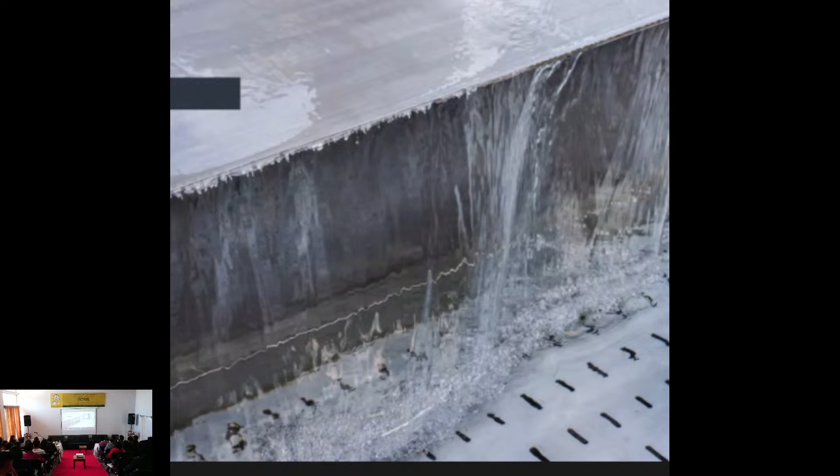And I also like the sound of water, not only the water without silence, but sound of water, the music of the light, and also cascading green and light together entering into deep. I like the untamed green, not only untamed green, also tamed green, very cultivated green, which is very much inspired by our landscape. And I love to see how the light is penetrating into deep in my project, and it's like dancing within.

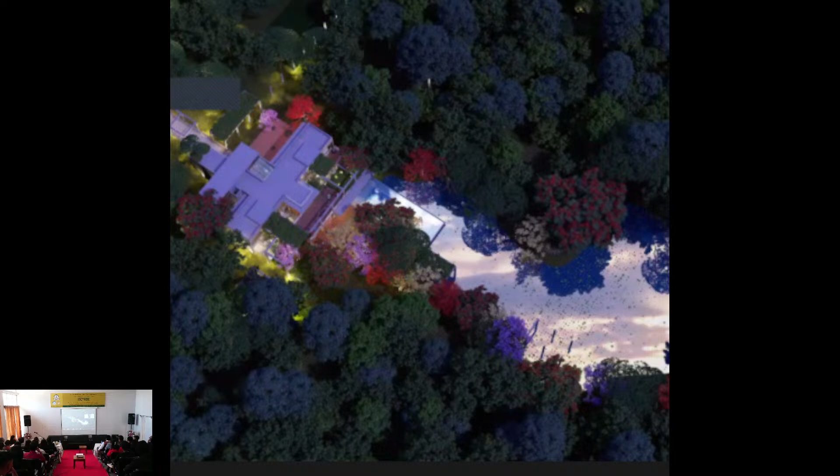And then the incline in the afternoon, it inclines and inclines, and it's stretching its last light to twilight. But after the dark night, crossing any sort of foggy winter morning, the first light, when it touches the land and water, it turns into watercolor again. So to me, architecture is very poetic, like watercolor or like a painting.

So at one stage, I started rethinking my country where I used to live, Dhaka, which is almost tropical. So how should we deal with urban tropicality? Because in the rural area, tropicality is beautiful, but in the urban dense city like Dhaka, how should we rethink urban tropicality? Definitely, tropicality is all about green and water and moisture and things like that.

This is one project we did in 2001. This is a drawing from 2001, almost 22, 23 years back, when I think the whole world was not thinking much about green architecture. Of course, my green architecture is not typically today's green architecture coming from points marked on a checklist. It's coming from Bangladeshi lush green and water and rain and sunlight and things like that. So this is what I started thinking, how we should deal with urban tropical architecture.

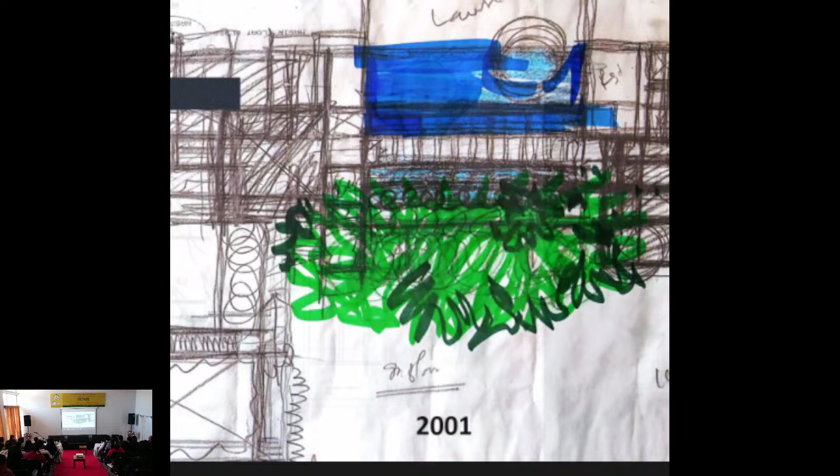So I started calculating how the sun is moving, how it inclines in the winter and comes back to the vertex in the summer, and how the wind comes from southeast or southwest, some wind without rain, some wind with rain water. Then how to plant every floor with upper floors of large, long trees, creating every floor actually as a tropical floor. So this is all the detail we started working on, and then coming up with something like a swimming pond.

We call it swimming pond, meaning we should have steps into the water, which I think in India is also called ghatla or ghats, and large trees like a jangla, a sort of untamed forest. So this is rethinking the built environment, not a typical swimming pool, but a swimming pond.

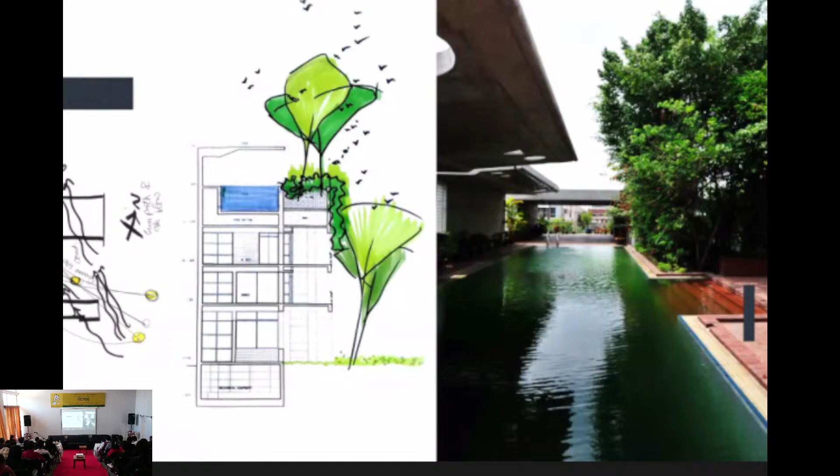So this is what we ended up with, that house. It's like a very untamed Bangladeshi landscape with water and rain and things like that. And gradually we were doing a lot of similar things, like we said every floor should be the ground floor. I mean, since we have beautiful light, alluvial soil, and rain, why not create every floor full of greenery so it becomes the ground floor? So I love to live always connected to ground.

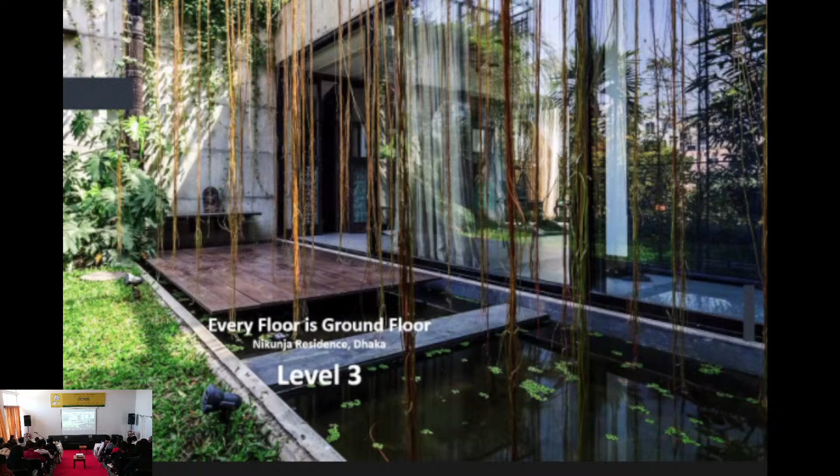I don't want to go 20 stories high without my belongings like water and green and birds and sunlight and the sky all together. I would like to go up and up and up in the sky, but with my belongings. So this is the upper floor, level 3. Still you can see a lot of greenery and living in a tropical area with the beauty of all the natural things. And this is another upper level floor.

And then we need to actually rethink. The subject, the conference on rethinking, is not a constant word. I mean, it's a continuously changing word. We must rethink and rethink and rethink every possible time and project. We need to rethink and reinvent the newness and the nowness together.

So rethinking the history, Bangladesh is a very, very old country. We have almost 3,000 years of historical evidence, like Buddhist monasteries, for example, more than 2,500 years of history. So if you see such a beautiful courtyard created by the Buddhist monasteries for educational purposes, these are all viharas or universities for enlightenment, Buddhist enlightenment.

So when we started designing Aga Khan Academy, the school, the first thing we started thinking was that we must connect our historical educational history in terms of all senses, like space quality, the material, the education, enlightenment, all the things together.

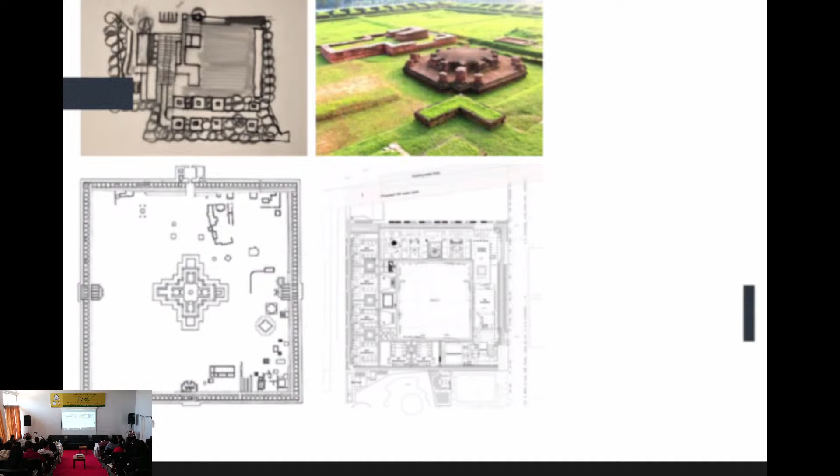But the essence of brick is there. So we incorporated a sort of half scientific approach, coming out from the archaeology but going towards the future. This is the final master plan, surrounded by a beautiful large field, which is the spirituality in the middle, surrounded by buildings and courtyards.

Here you can see one part of the building, and the plan, since we call it education, a didactic place. Didactic means something which can teach you - you can learn from it without somebody teaching you like teachers do. The idea is we will learn from the environment and the structure, not just by teachers teaching us. The tree you see is called Butea monosperma, actually Palash, red flowers, local name Dhak.

Dhaka's name, there is a legend that says it came from the Dhak trees, because we have thousands of Dhak trees in Dhaka, red flowers. So we planted the tree in the first courtyard, so children can learn that Dhaka's name probably came from these trees.

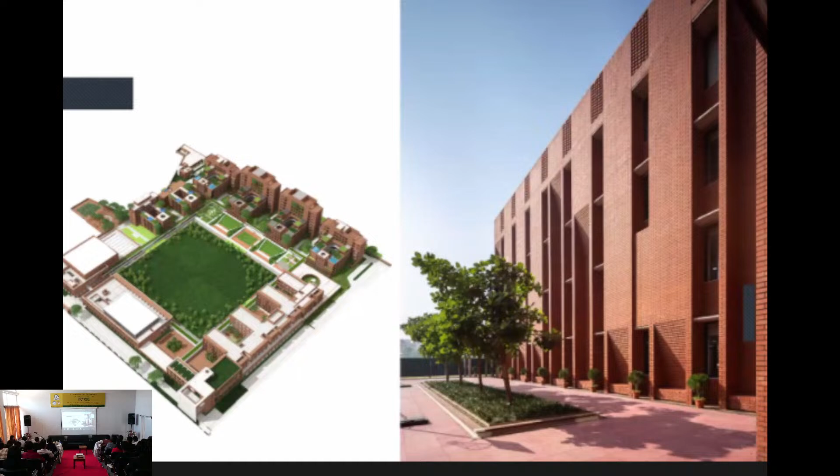This you can see is the central courtyard with the amphitheater, and the brick crafting is all important to reflect our history, our education, our mastery of the brick, and the nowness. And you can see the children are really giggling.

This is the field, the large field, and some of the interiors - the library and tiny gardens on the upper floors. This is the amphitheater full of children, pupils, and the teacher addressing them. That's the space quality that children will be learning in, and the vastness, the power of space, will hopefully make them very powerful.

This is what the last slide shows - the benches are almost like archaeological, and then it comes out as a full building gradually, showered by the winter light in the morning.

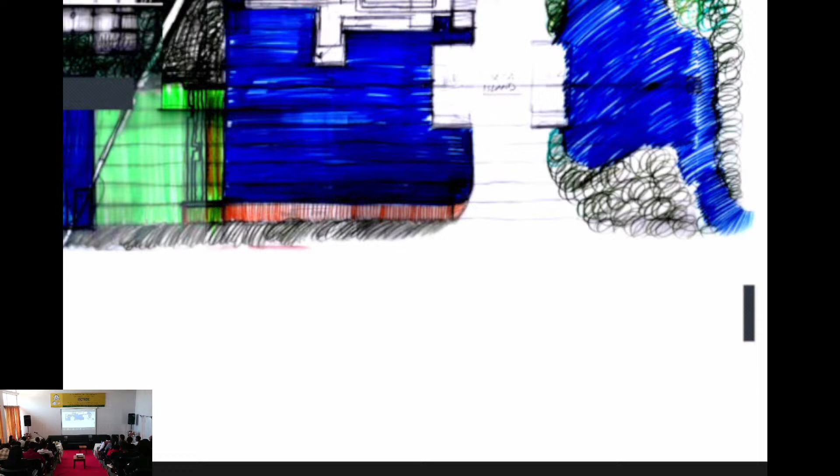And when we move from our country to another country, still tropical, you can see the Malaysian project - the client is very powerful, very aggressive, very rich, one of the largest developers in Southeast Asia. So tropical antiquity - we wanted to create something very classical, very powerful for them, but also tropical. This is what we came up with: 11-story columns with a super roof, shading most of the sun.

Creating a powerful statement of tropicality, the whole semi-basement roof is turned into a water body, a very shallow water body, not more than 200 millimeters, or 600 millimeters, sort of a rainwater collecting pond, with the whole building on it. But below is actually 350 cars. So it justifies the tropicality, collecting rain, and in case of fire hazard it's very useful for fighting fire, also giving a sense of tranquility.

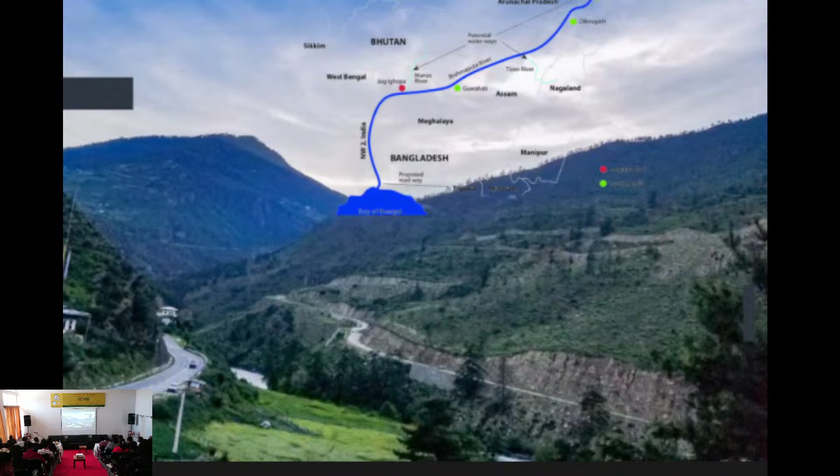Bhutan is very happy to recognize that the Buddhist monastery, Buddhist enlightenment that Bhutan is practicing, and having a peaceful country, is actually offered from Bangladesh. It's a gift from Bangladesh to them. The historical, archaeological sites of Buddhist monasteries - Buddhism created their hub in Bangladesh for many thousands of years and spread all over the world from Australia to Canada. So this is a gift to Bhutan.

Bhutan is very happy to have it from Bangladesh, and that's the reason Bhutan actually helped us during our war in 1971 and gave us recognition as the first country to recognize Bangladesh as an independent country.

So we were not only examining all the historical and geographical connections, but also checking out the traditional courtyard that they have. We have similar courtyards, and they have beautiful windows that we don't have. They have large canopies on the roof, and Bangladesh also has large canopies because of the rain situation. So there are many similarities, and also some interesting differences.

We are also interested to understand how the sun moves, how it inclines further south in winter, and the amount of rain - which is 1599 millimeters annually, while Bangladesh is almost 3000 millimeters per year. So we're not very far away, but we have more rain, they have a little less.

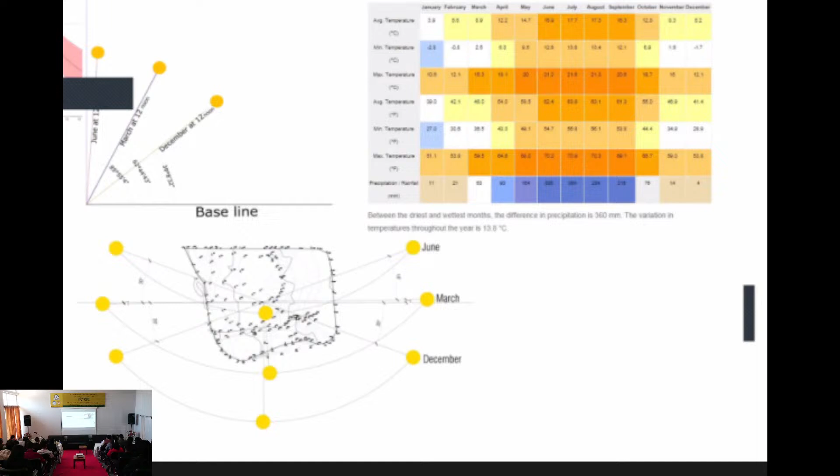The river is going down gradually, so my drainage system is not in a bad situation - I can put all the water into the river, and we can see the beautiful green Himalayas. And this is what we have created.

A small water body in the central courtyard - we call it Bay of Bengal, as if collecting water from the Himalayas and calling it Bay of Bengal, which is Bangladesh, now at the feet of the Himalayas. Now the Himalaya can see the water she created is the Bay of Bengal, belonging to Bangladesh, now came together - that's how we're coming together and creating our diplomatic relationship.

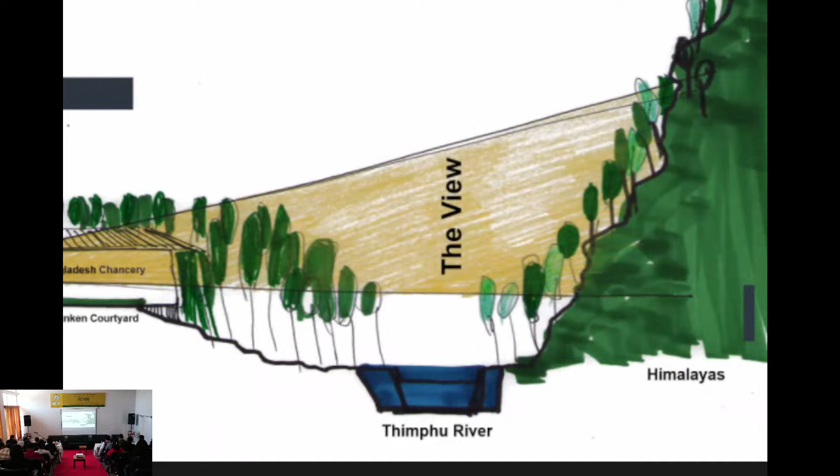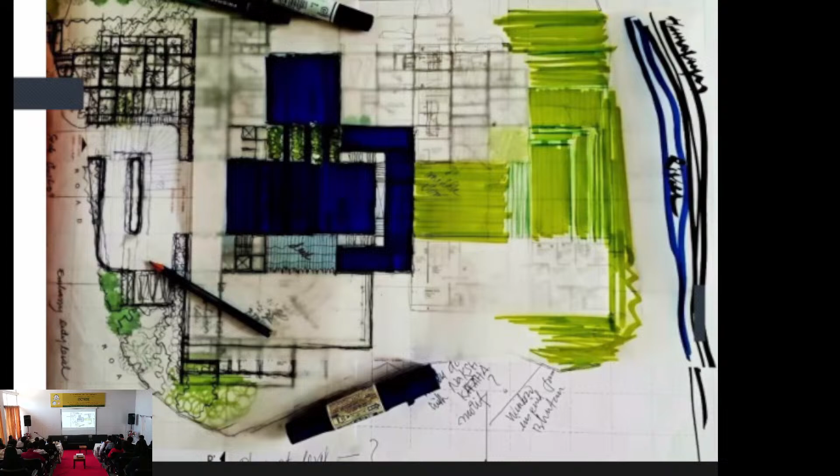This is how we are rethinking our relationship. You can see the courtyard with the water, and the buildings surrounded by it - the water court and green court, surrounded by buildings, all collecting the sunlight in winter from the southern and western sides, making it warmer.

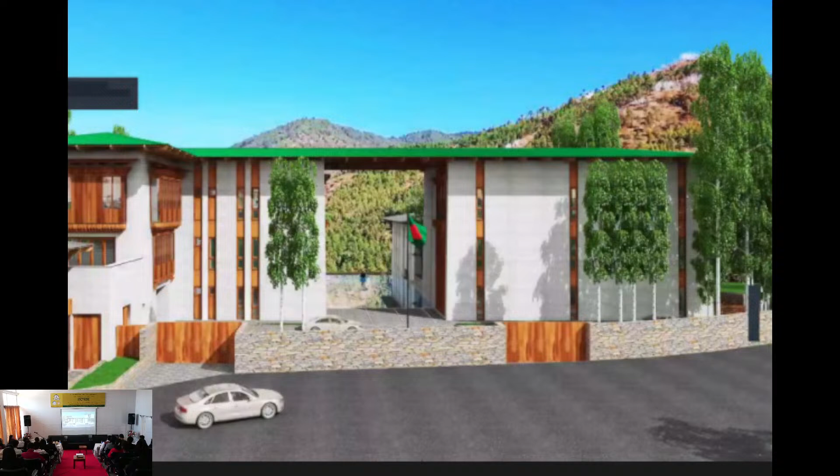So this is how the building came up. We also followed most of the Bhutanese rules, because we don't want to break the rules, though we have the ability to - as an embassy, we could build whatever we feel like.

India has built a completely modern building, which has nothing to do with the Himalayan architectural language, but we actually respected their language because we know how they earn money through tourism by showing people similar buildings, not different types. So this helps them in their financial development - our role should be positive there.

So you can see a big window punched through - I can still see the old Himalayas from the street, which has been there for a long time. We didn't want to hide it completely from people's eyes, so we created a social window to still connect with the Himalayas in the background.

So we used concrete for the first time because the Himalaya region is very vulnerable in terms of seismic conditions. You can still see the courtyard with the water and the reflection of the Himalayas - and this is what it looks like in the evening.

Rethinking archaeology - when we started working in Pakistan, interestingly Pakistan is exactly opposite to Bhutan. Not our friends, not many years actually they've been friendly with us, no connection in terms of water or culture or any other ways, but we came together as East and West Pakistan and ended up fighting each other, killing 3 million people of Bangladesh by Pakistanis.

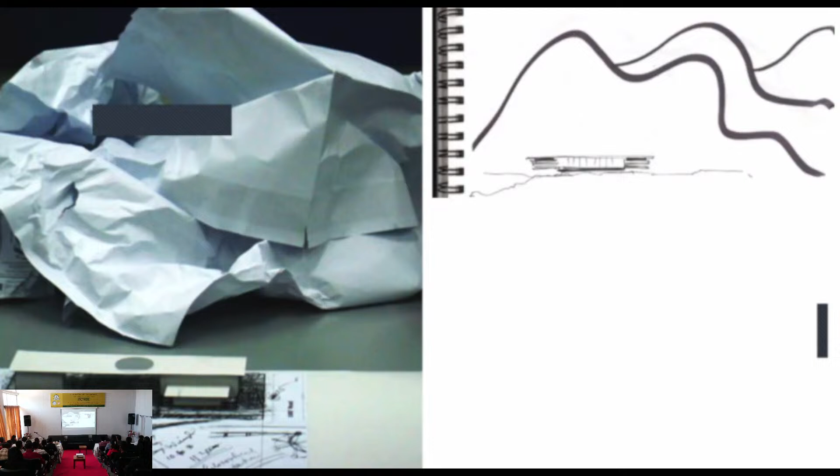So we took advantage of connecting historically, not in a current way, which is very difficult with Pakistan. This is what my site belongs to, a large 7,000 foot high Margalla Hill, and we have a very humble building over there, very contrasting to each other, showing the power of humbleness against the ruggedness of the Himalayas.

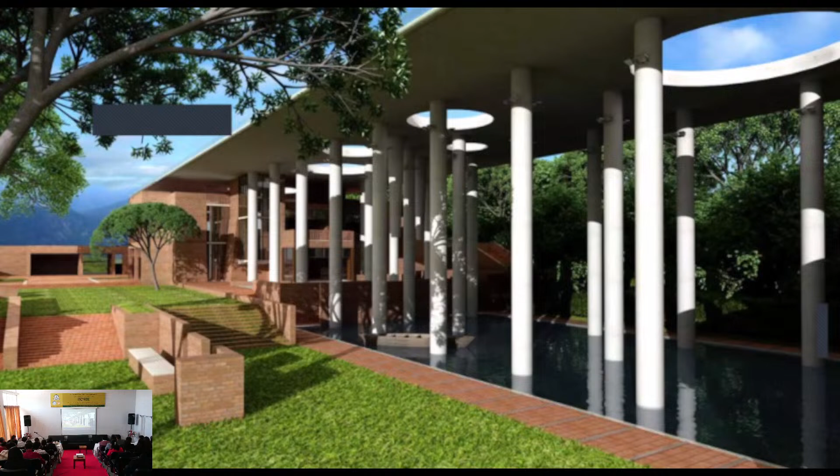So this is what we came up with - archaeological-looking Lahore brick, a locally available brick structure which looks like archaeological sites, covered by a huge super roof, 500 feet long, with punctures to collect some rain and also some sunshade, creating a shallow water body for moisturizing the whole area as much as possible to cool down the temperature and reduce use of air conditioning and heating systems.

Rethinking built environment is the last portion of the lecture. I'll be sharing three projects basically, after roaming around the world lecturing here and there, teaching different universities, and learning more and more, or trying to learn more and more.

Finally, after COVID, I thought about what I'm achieving, what I'm looking for, where I'm going actually. Then I looked back to my old part of Dhaka where I was born and brought up. I left when I was like 22, 24, 25 years old, and I went back and saw old Dhaka is actually dilapidating further and further, losing the quality of built environment. And I'm doing nothing - I'm just achieving some awards and projects and earning a little money for survival or a better life, but I'm actually doing nothing for my community.

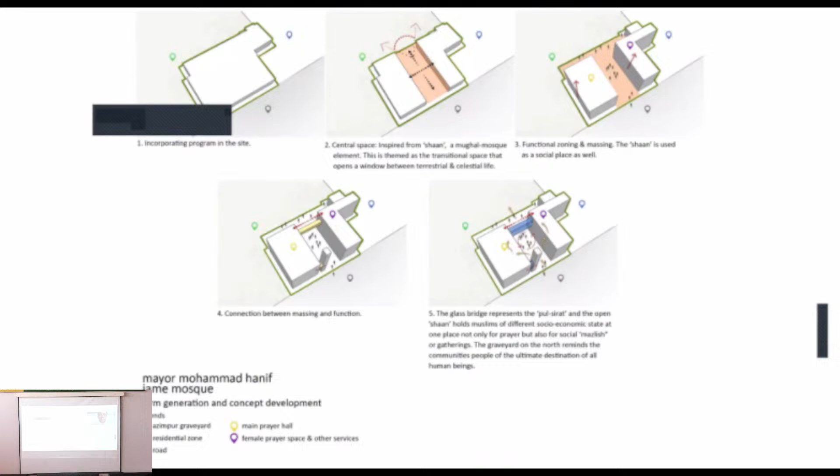This is how we created the spirituality in the middle of the mosque, the Shaan, inspired by the Mughal mosque. You can see the green patch is the edge of the graveyard, and this is how we created a puncture in the middle of the building, connecting the street and the celestial graveyard, and separating the service area from the served area — the mosque itself is the served area. You can see the mosque as the served area, and the ramp, car parking, ablutions, toilets, stairs and other things on the right-hand side part.

This is what you can see of the mosque. On the southern side is a dense, heavily built terrestrial world, and on the other side is a very tranquil, green, celestial, and silent world.

But the interesting, challenging part — we learned that the mosque was actually built by a person who is a political party leader, now running the government. You can see how politics works in our country: the father of the nation and the prime minister's photos are still the smallest. Gradually the local leaders and the mayor, in suit and tie with black hair, have larger photographs, but the contractor himself has the biggest photograph — he's the local political leader, so his photo is the biggest one. You understand he is the power over there, and he is going to build.

Actually, he is going to rehabilitate — the government rehabilitates this sort of people, and they earn money out of it by ruining the architectural project, just earning money and not doing quality things. This is the strategy, the hegemony that has been going on for many, many years.

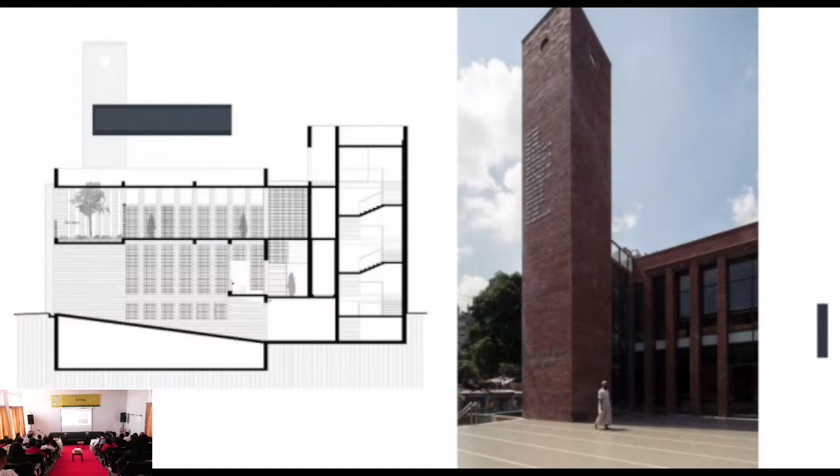And these are the sketches and sections you can see. This is how the brickwork happened, very carefully done. The person walking there was actually the contractor's first choice — we provided him because he is very good at this sort of brick construction. And you can see, in the twilight, the courtyard, which is a public space for the community, with the mosque inside and the glass bridge.

A place for women, we can pray over there. Inside the mosque, you can see they connected to the graveyard through the window, and the skylight coming in. The imam who will be leading the jamaat, the people who will be praying, the imam will be under the beautiful light from the sky, heavenly light, and the floor is beautiful.

All space belongs to him, rather than putting a mihrab, which is a normal thing in the mosque. We didn't do that. It was a very challenging for us, but anyway, we did it.

Now we move on. We did 31 parks and projects, parks and playgrounds to be revitalized. One of the playgrounds was really bad shape for the last 30 years, and we were unable to do any improvement. But we did a lot of research and finally came up to this current situation of the same old playground. I'll explain the last two projects, how we did it, and that will be the end of my presentation.

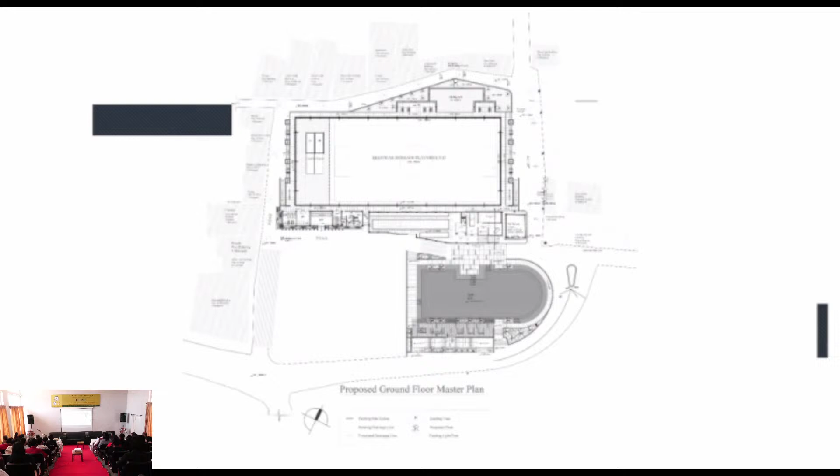We also improved the saint's mazar, or tomb, of the person who donated the field for the community. We improved the tomb, surrounded by a library, gymnasium, public toilet, coffee shop and things like that. Finally we came to this solution: the field itself, surrounded by walkways collecting the rainwater, and the pond, and all the mazar and tomb, everything created.

It was an old photograph. Now we can see how we improved it. You can see the conical crematorium for the Hindu community, and the public space, with the Hindu community gathered. And this is what you can see: the minaret of the mosque for the Muslims, and the Hindu crematorium beside the Kali Mandir, and the public space all belonging together.

So harmony came, and the field, which was in a really bad situation, is now totally improved. You can see the whole thing together, the mazar and other things together, creating a community. So architecture can make community stronger, further and further.

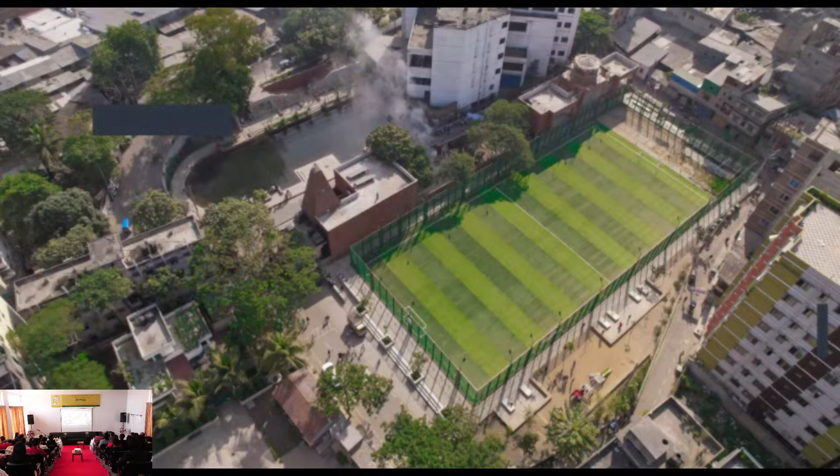The last project is Last for Life, the Rasulbagh Community Park, Shishu Park. This is the only way we can go to the park, there's no other way. You have to walk through a roughly 1 meter wide corridor, which floods in monsoon, and is unhealthy otherwise. When you reach the park, it's surrounded by a wall, and the walls are illegally occupied with shops, so it's very difficult to even see what is inside.

This is the only drain collecting rainwater, also collecting the sewer system of 19 houses, and the whole thing is illegally occupied. One sewer is flooded and staying that way for months, and you can see live sewer floating around, which is extremely unhealthy for people, particularly children. If you see inside, the plant is dirty. There is a building built for veterinary purposes that never had any function, but it's illegally occupied by a political party office. Now it's very difficult to push them out.

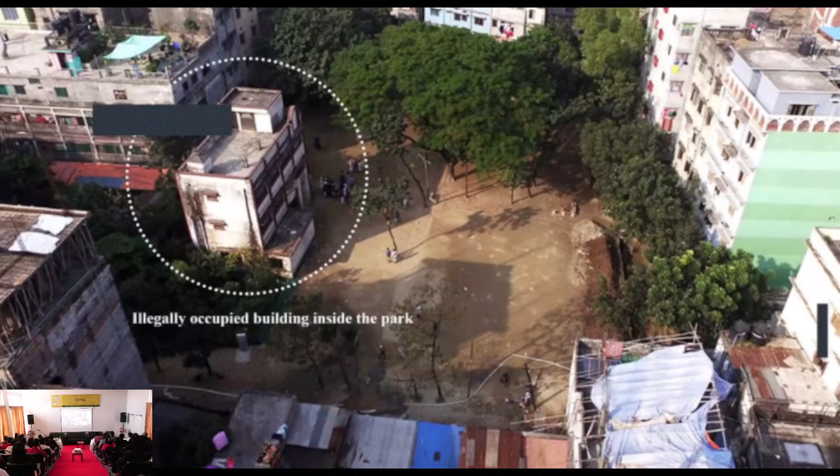You can see what we call a public children's park, which is absolutely not acceptable. For the last 40 years, it's been happening like this. What we did, we developed almost four philosophical understandings.

One is that every park and playground's surrounding walls and barbed wire or grills or fencing should be removed and completely open, telling people it's theirs. Nobody is going to tell you to stop. There's no gate, everybody can go there and occupy it. It's 3 o'clock in the morning, doesn't matter, so it will be owned by them. But we cannot just leave it open without it being properly taken care of.

Another big problem is the rainwater. Huge rain, and it's always flooded, and then mosquitoes and waterborne diseases are suffered by children particularly. So we manage the water actually. We have a crisis of drinking water, but we have a huge amount of rainwater we cannot use. We die for drinking water, and we die for malaria and dengue and other things. Very funny and interesting.

We started calculating the amount of rainwater, collecting it, filtering it, and then giving it back to the community as drinking water. So we started conversation with the people, listening to their sufferings and problems, and how to resolve them. Together we started sorting it out.

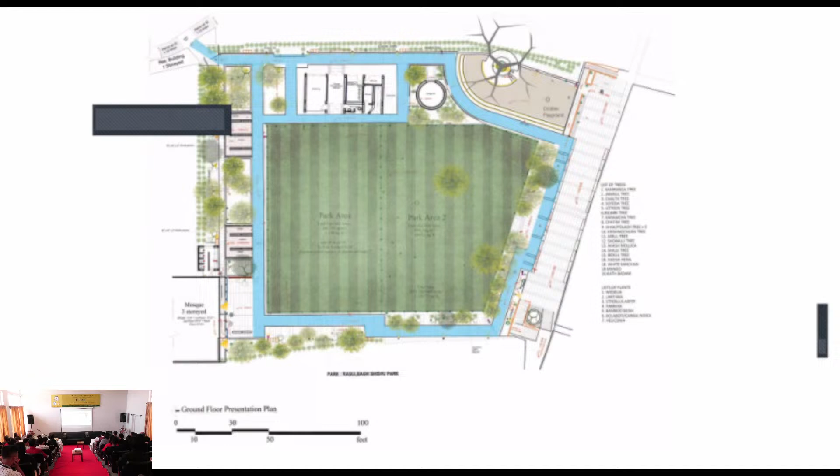Now the park is totally in use. The walkway actually contains a deep trench, about 5 feet, 1.5 meters by 1.5 meters, which can collect all the rainwater separately for drinking purposes, filtering it and giving it back for drinking. You can see the section, both sides have trenches, and the dirty drain water has been separated so it cannot contaminate the rainwater.

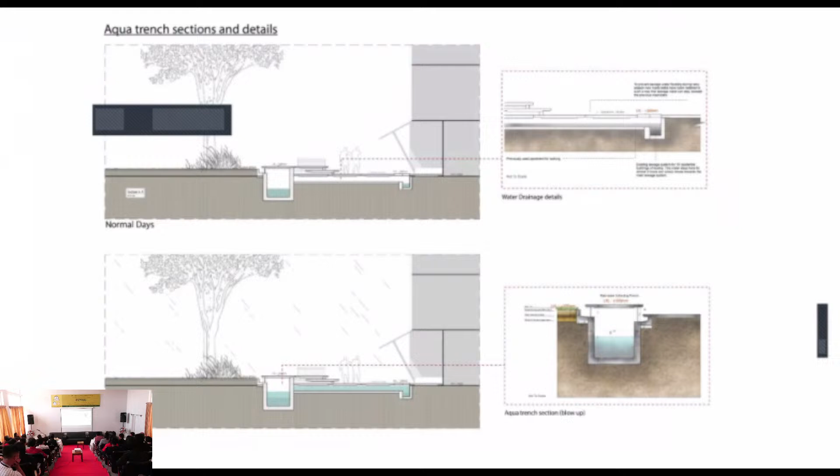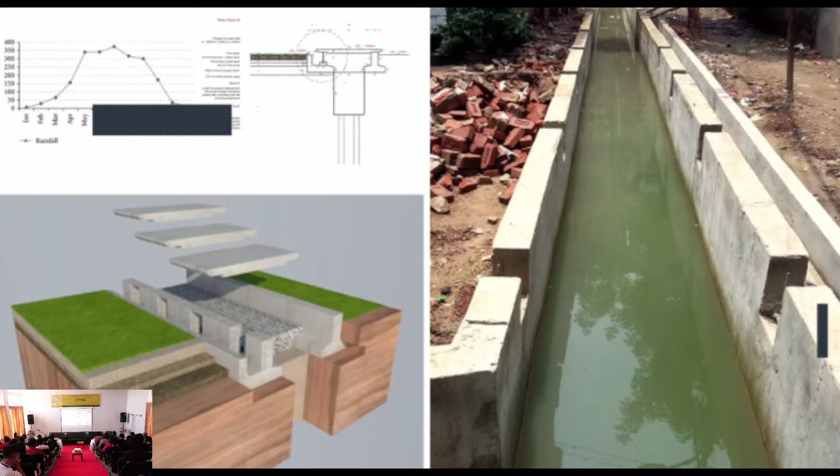This is how we separated and collected rainwater, and we started cutting the trench. You can see the trench started with one drain collecting water. We couldn't bring big materials inside, it's so narrow, so we only built 1200 pieces of concrete slabs, which did all the work of covering and creating the space.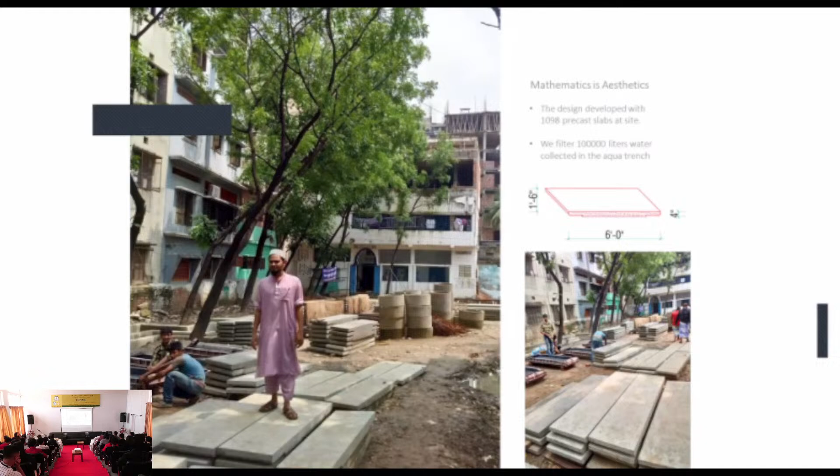Now finally we dismantled the wall as a philosophical execution - dismantling disrespect and distrust rather than just dismantling a physical wall. Then it turned into a space, and you see all the people gone to the other side, opening their shops legally rather than illegally.

Now you see after the rain, it's immediately much more beautiful. It's a beautiful park, and it's raining. So rain is no more a pain, it's a celebration. You can see the earlier photograph, and the same spot now is full of plants, like a beautiful garden, made by the children themselves of the community. They planted all the plants and fruit orchard - very tiny local fruits like chiku, custard apple, and star fruits and things like that.

Very humble and simple. More and more birds are coming, and more children are coming. They are eating, birds are eating. They're seeing each other, knowing each other, and they will be running after butterflies.

No more drugs, that was the philosophy. And now you can see adolescent girls coming out, which is almost non-existent in our society. Normally they don't come out due to fear, and the built environment is not favorable for them to come out.

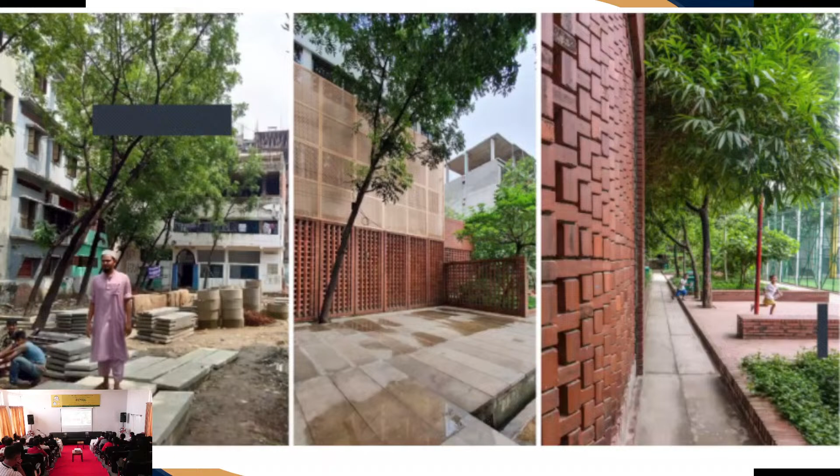Lack of money, we couldn't do that. But finally we managed to push the political people out of the building, and converted it into a women's club, community library, gymnasium, and coffee shop, which finally came out like this.

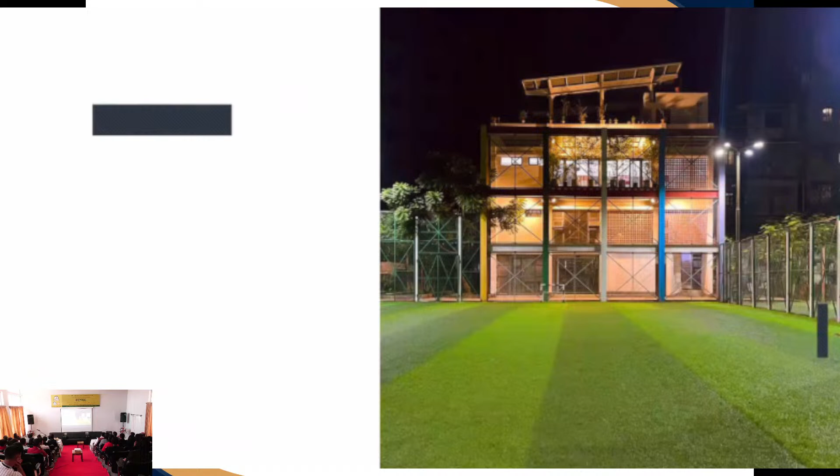And you can see the children are inside, and it's a very popular library nowadays. It's always full of people over there.

The women's club is always busy, as old Dhaka people are very religious, many women. They used to come here, they sit, the children can come, they can play, they can draw pictures here.

And finally, this park looks like this, but the adjacent community situation is really very challenging. Inside the park it's very hard to manage, it doesn't match with the outside, so we had to put people over there.

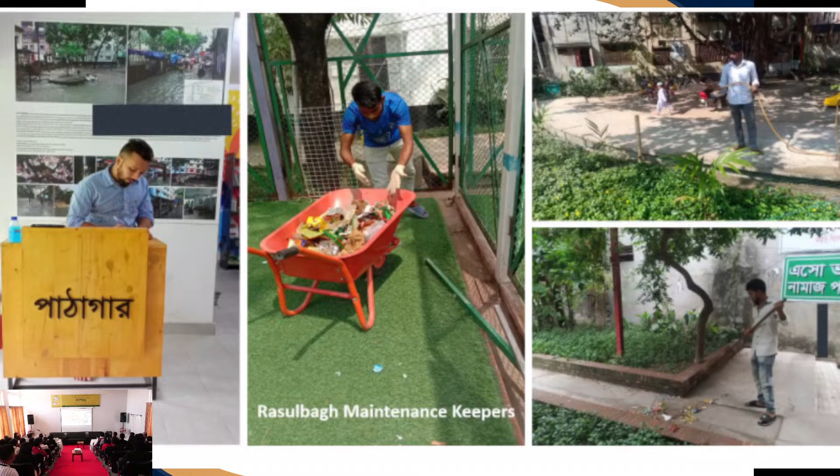These people are from our own office. People want to keep it and show the community. Maintenance is very important, so they have actually been maintaining everything for the last 4-5 years.

Now you can see the people are collecting water, very fresh water, for the last 5-6 years, and they're very happy to have the water every time for the last many years.

And finally, you can see the children are laughing, they are just playing over there. The whole purpose of doing architecture, or any profession, is to ensure our children are growing up safely and happily. That is what we are trying hard to do through our architecture.

So lastly I have a 3 minute video, which was built for the United Nations and UIA, and it won the award as one of the 21 finest projects in the world. That will be the last thing I'm sharing with you.

This is the evening, the new evening that came to Dhaka, old Dhaka, and this is what we call the old Dhaka news story. I'm running this one. I hope you can listen also, if the sound works, no problem.

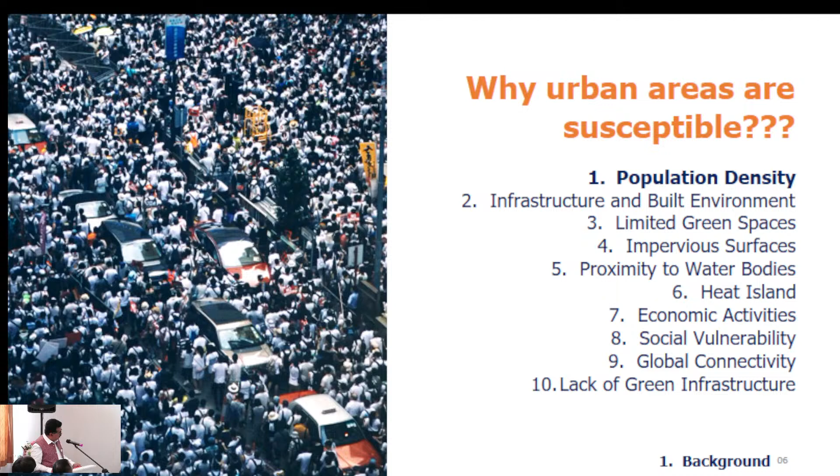And then second one is infrastructure and built environment. I am finding it difficult to take it for a second. Now you can see the kind of infrastructure, that's transportation hubs, roads and lanes, parks and playgrounds, recreation areas, and the kind of areas where the city has got its own image in terms of the particular town. It is getting overstrained because of the high level population growth and unorganized development.

When there is such kind of unorganized development, what are the ways we can look at organized development? There are several things we are seeing: transit-oriented development, compact city development, and other developments like fringe area development. These kinds of densities, once they get increased, in what way can we bring the thought process in terms of the infrastructure? That's infrastructure, especially...

Yeah, it is better, I think I can keep the messages. So these are the built environment specifically related to what? Whenever we get a built environment, in what way are we going to address it? First, the kind of solutions like different land use zones we are having. In the land use zones - residential, commercial, industrial, or institutional - all these areas, as an architect, how do you address it? Addressing in terms of land potentiality, land utilization systems, climate, and other items like what it is going to get influenced - topography, climate, and other items which influence nearby land uses, traffic generation points, and connectivity - all items which create an impact on the built environment.

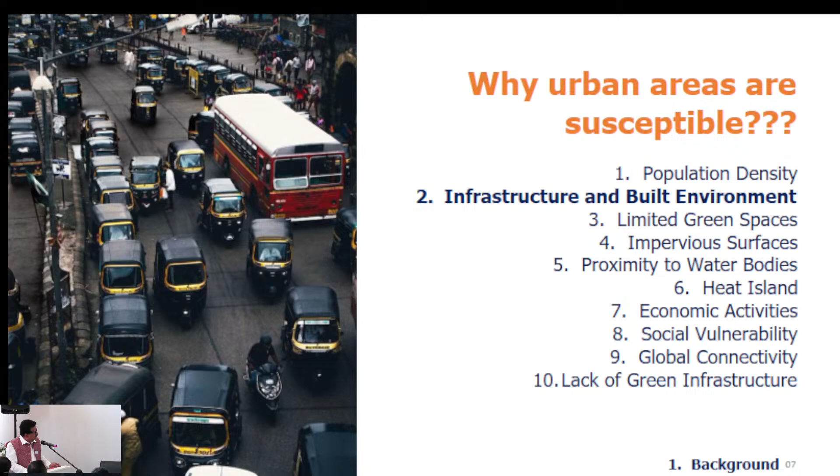Limited green spaces - what I am speaking about is water and the green spaces. They have been developed and people keep enjoying it. Green spaces meant for two parts. One, in what way that vegetation index overall is going to contribute to the pocket of space, what it has been designed for different types of development process.

Whether that built environment - a built environment has to be seen on the basis of the floor area being used, and floor area versus occupancy. Occupancy related to the open spaces we are giving. The open spaces meant for paved and non-paved areas. When it comes to non-paved and forest areas, then to what extent is the vegetation going to get addressed. That vegetation related index, in what way it is going to provide per person how much square meters of area we have provided. So at a master plan level, 8 to 10 square meters of space we have to provide for the green space.

Such times, once you are not in a position to make it to the city level, urban level, or built form level, then in what way can these green spaces be addressed? Green space is not only a piece of land you mark for it. There are many ways we can address such things - what kind of vegetation, paved and non-paved surfaces, soft and hard surfaces - what we are going to design, and in what way we want to quantify it.

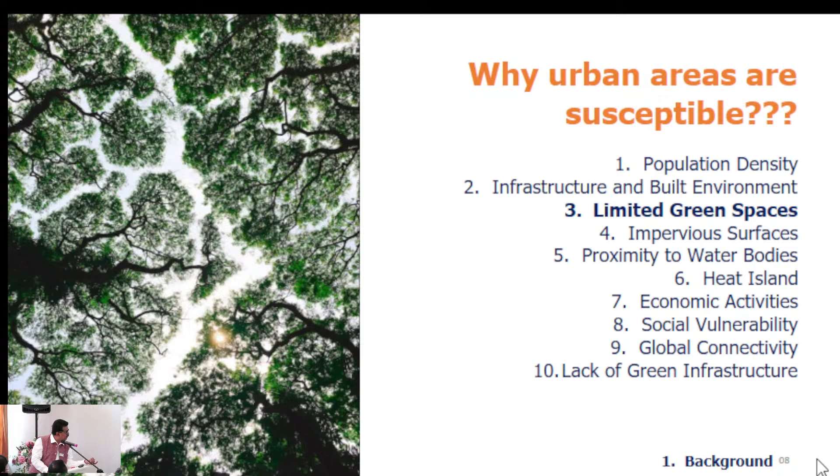Impervious surfaces - what are they? There is so much paved area we have nowadays. This is exactly how floods and other problems occur. The issue is that paved areas normally make the runoff go to one particular place, where there are low-lying areas and highlands and lowlands. Lowlands get flooded, even with cloud bursts, because of how the drainage system has to be designed.

Everywhere there is a system where you keep safety conditions. For instance, at this speed, this many meters per second or cubic meters per second of water has to be moved from one line to another in a residential pocket. Street to street it has to be worked out, and where it has to really get collected. The collected water - how much is going to get absorbed. After absorption, the runoff starts and floods different pockets.

How can we address this? In the Indian context, the moment most citizens buy a plot, immediately the person will put a compound wall all around. The compound wall and the road really end up covering the natural slope, blocking how the natural streams are getting across.

In some places what we have introduced is: you can have a compound wall, no doubt about it, and build whatever form you want. But at the floor level, don't disturb the contours, don't disturb the natural flow. Make perforations beneath the compound wall. For instance, if you have a foundation and the water needs to cross 2 or 3 lanes to reach the discharge point where it's supposed to get collected, the perforations allow that.

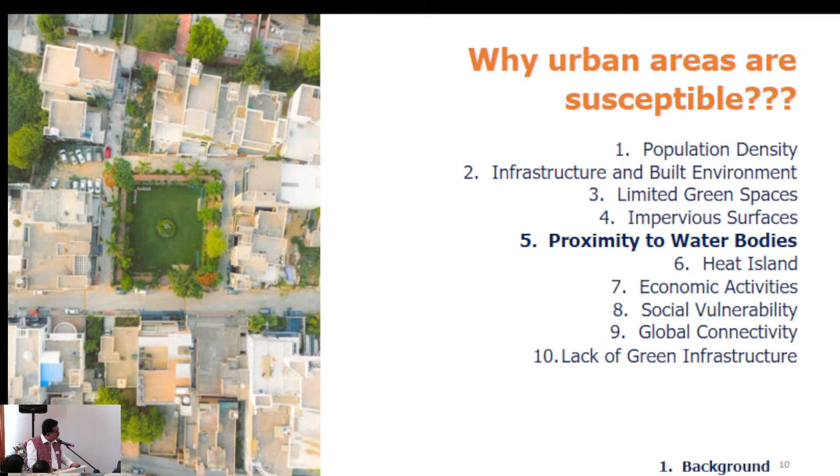So, as you know well, the heat island effect. Why does the heat island effect happen? Because of exposed surfaces and the change in climate and temperature rise, especially in summer. Exposed surfaces mean the facing materials or any other material getting exposed to solar radiation and temperature, both together called sol-air temperature.

Sol-air temperature works like a film on the surfaces of the materials. Through the conduction process, through the thermal behavior of the materials, heat moves from the higher side to the lower side in the form of conduction.

Higher side is outside, let's assume for example. Then the temperature and radiation together, in the morning, heat the surfaces. Just think about what exactly solar temperature means.

If you start heating a pan, what happens if you bring it closer to your hand? You need not touch the pan; once it comes very close, you start feeling the heat. The reason is it creates a film of heat, as the solar radiation continuously heats the external surface of the wall.

At the same time, the sol-air temperature is the one which is higher than the indoor temperature, so the conduction process starts. And the conduction process also depends on the behavior of the material we are using, that is the K, rho, C value generally we say: conductivity, density of the material, and specific heat of the material.

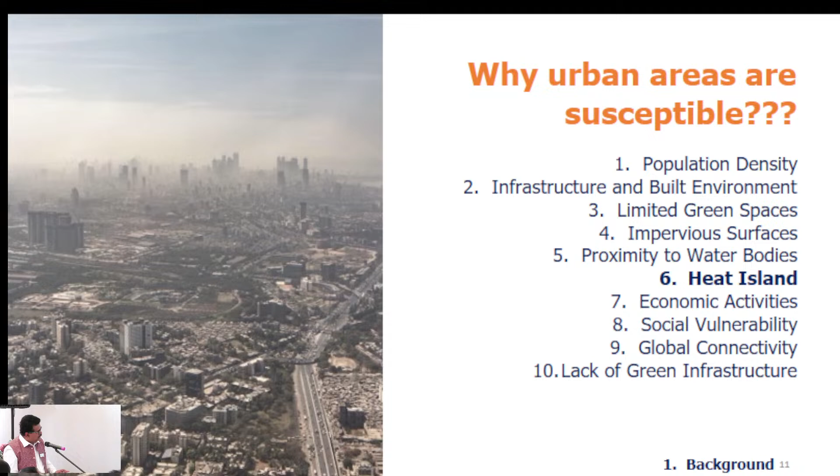Economic activities, we have to think especially in terms of economics, how affordable it is. The affordability of one particular place may not be the same as other places. Our main target is to identify who are really more susceptible, the vulnerable groups where we have to look at it.

Either it may be urban slums, or areas with dilapidated conditions as shown to us in Dhaka. There are so many community levels where community organizers' role is also required, making them understand how to work out a better environment in different locations where haphazard development has taken place, with buildings constructed that are dangerous to habitation.

They may not have the technical understanding and technical know-how, and may not have been constructed with proper thought process. Such buildings are subject to seismic attack and seismic conditions. Even if the Richter scale reaches 3 or 4, minor vibrations may immediately occur and cause the slab to separate from the beams and columns.

So to what extent this economic activity and affordable groups, the vulnerable groups and economic activity, has to be critically viewed. In cities, specifically urban areas, you have different types of economic groups, even starting from economically weaker sections, low income group persons, and MIGs and HIGs - all persons are susceptible to climate change.

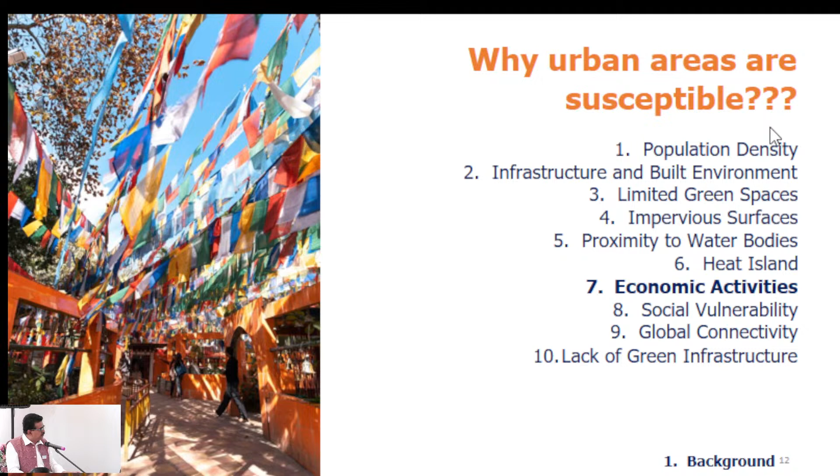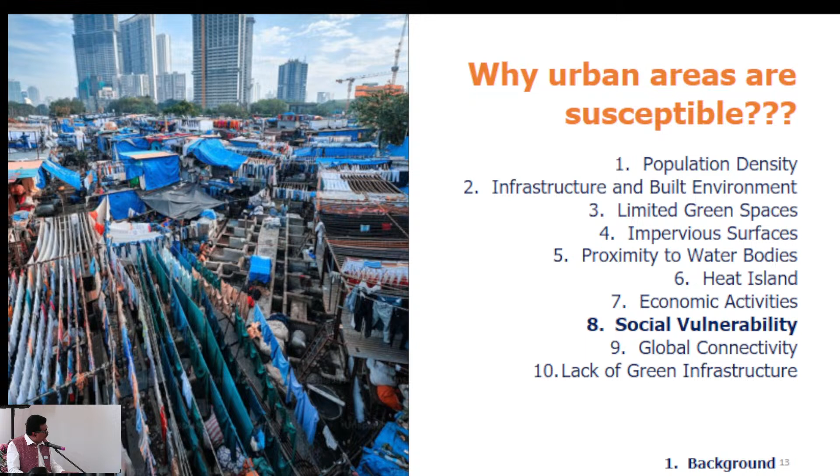Social vulnerability, probably I have seen it. Then specifically when you look at this global connectivity, TODs, what we are thinking about, other than the general built form and built form related environment, is what we think about to bring in better conditions to a particular town or any other country, in planning and other items.

Other than that, there are areas of transit-oriented development, TODs. TOD means an area where people are giving a very big focus. A hub is going to get developed, either medical facilities and supporting facilities required to nearby settlements in the regional planning, or in a region which is really missing, sometimes an educational activity and a full township, connecting to the highways, district highways or national highways, and closer to the cities. That kind of thing can give facilities to them, and you can create a better environment.

These transit-oriented developments are essentially required, and that is what we can call global connectivity - maybe airport areas, and the corridors leading to ports, corridors leading to airports. Why this is so important is the logistics of goods, and the kind of economy that gets generated.

In such areas, earlier in built form developments or broader town level developments, we used to not encourage ribbon development. Ribbon development means development next to the road - if road connectivity is there, the entire stretch from one settlement to another, along the connected road, you see development on both sides, and then development starts only after two or three depths of streets. This is generally not advisable, because it becomes a very heavy burden on the local bodies to provide municipal services - either solid waste management, provision of electricity, or piped water supply. So ribbon development we avoid.

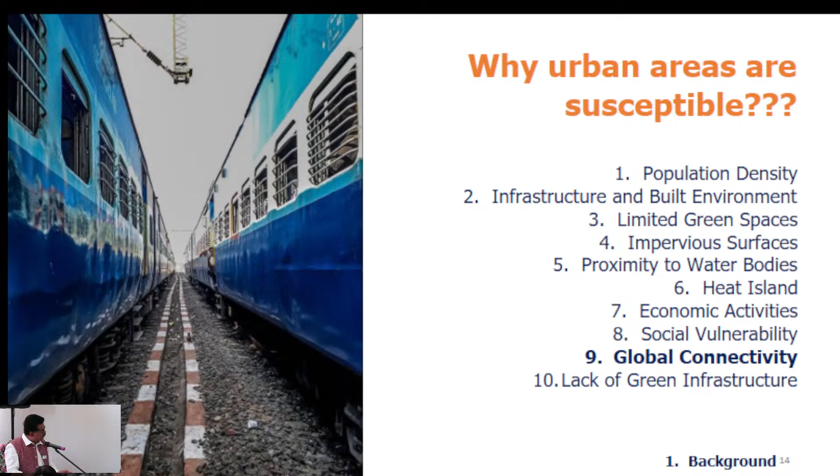Of course, green infrastructure I have broadly covered. Given these vulnerabilities, this is crucial for urban planners, even policy makers, and specifically communities should adopt climate resilient strategies in urban development and disaster preparedness. This is one item we should keep thinking about. Secondly, we can focus more on how resilient and contemporary these cities and communities are, and how ready they are to face the multiplicity of challenges and uncertainties in the future, because decision making under uncertainty uses operation research models.

We are slowly entering into the digital world. You people may not be knowing this, but just around 1985 or '84, we used to punch cards for the computer just to do Fortran programming. With punch cards, we used to go to a computer this big at the AC Tech campus of Chennai. There would be a big queue - electrical engineers, mechanical students, architectural students, all standing in a queue. I'll tell you, from morning 4 o'clock onwards we used to be there in the queue, because if the assignment wasn't given within the time set by the professor, we would get a zero directly. So we would complete the entire Fortran programming and punch the computer cards.

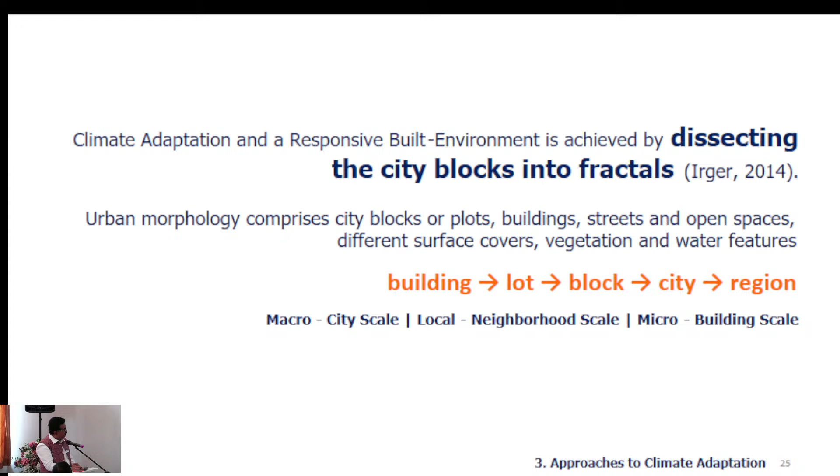where is this again?

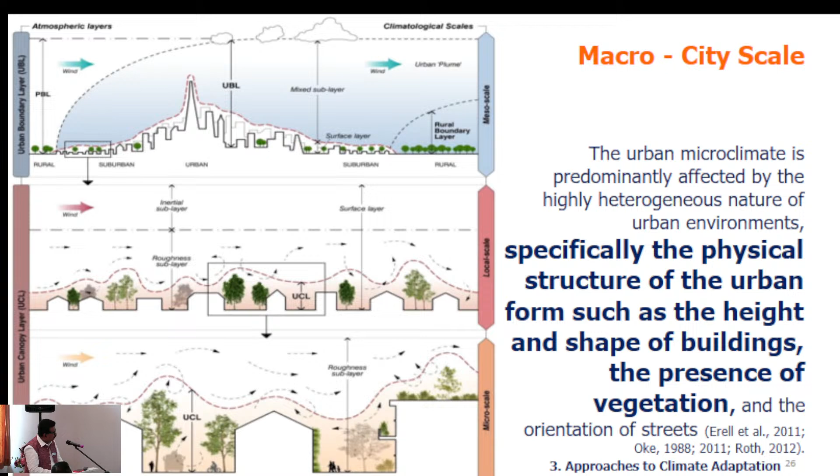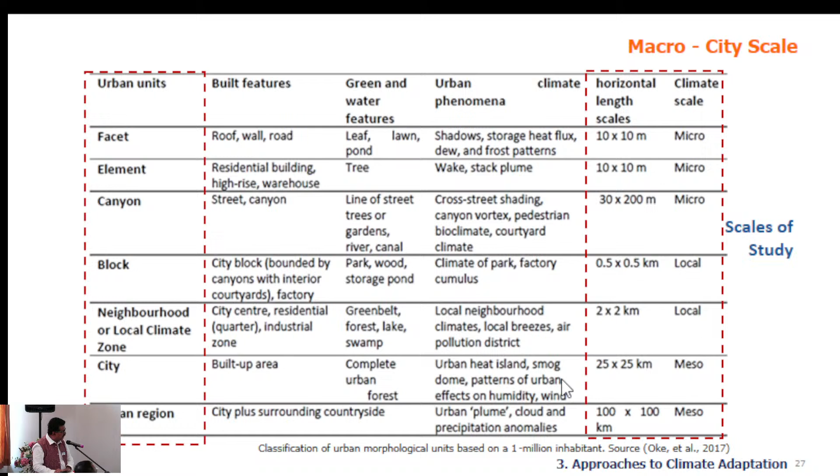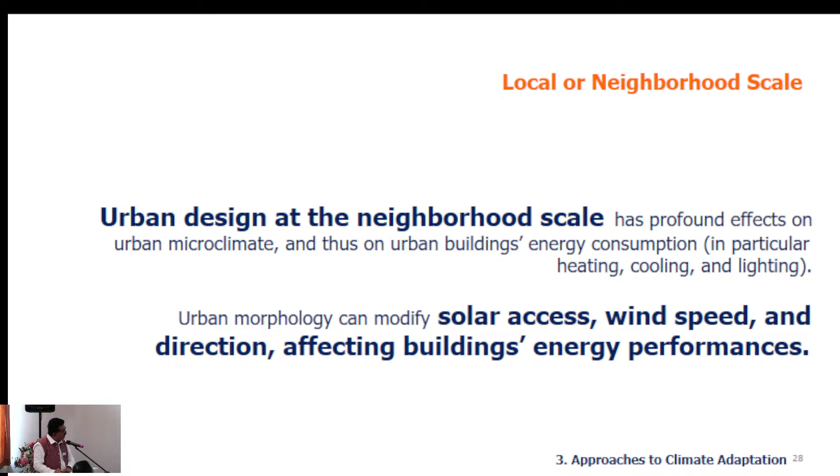Urban design at the neighborhood level has a profound effect on the urban microclimate, and morphology can modify solar access, wind speed and direction, affecting buildings' energy performance. So broadly you can see items like type of use, domestic systems, efficiency, space heating and domestic hot water systems. Every item works together to give parameters, and there are effects like radiation - if you look at it, albedo and emissivity it creates.

Thermal - if you take heat effect and capacity and thermal mass storage systems, it talks to that. Moisture means to what extent we can seal the evaporative surfaces, increasing surface runoff and reducing evaporation. Roughness is the roughness index - all these items, when you build an algorithm, become the coefficients that get multiplied to give you the appropriate results. So these are the items that a particular software or algorithm looks at - radiation, thermal, and moisture.

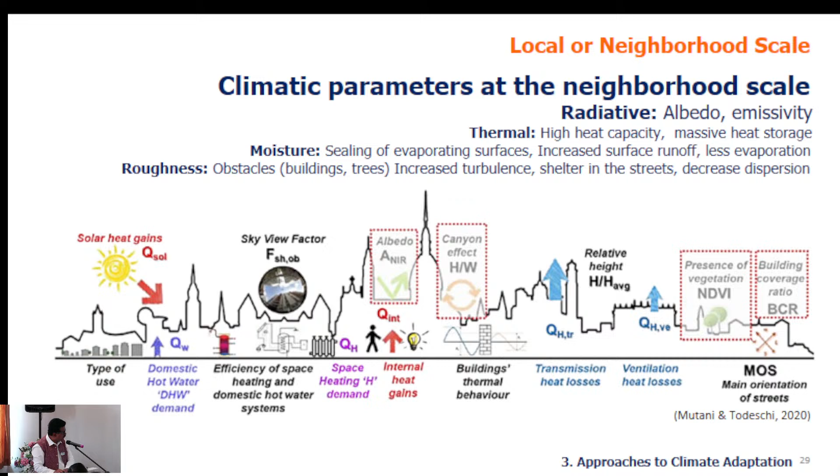Sir, I have time. N is the built form - the sky view factor, aspect ratio, building footprint, impervious, pervious, height of roughness, and terrain roughness. These are the important parameters.

If you work out the built form of a cross section, you can see how we can work out all the other items and bring better conditions to different regions, whatever fixed conditions you want within the building. Within the building, you have to fix these conditions. For such conditions, what is the orientation, what exact opening sizes, what exact heat transfer from outside to inside for different months, different seasons, or different regions.

Can you press? Okay.

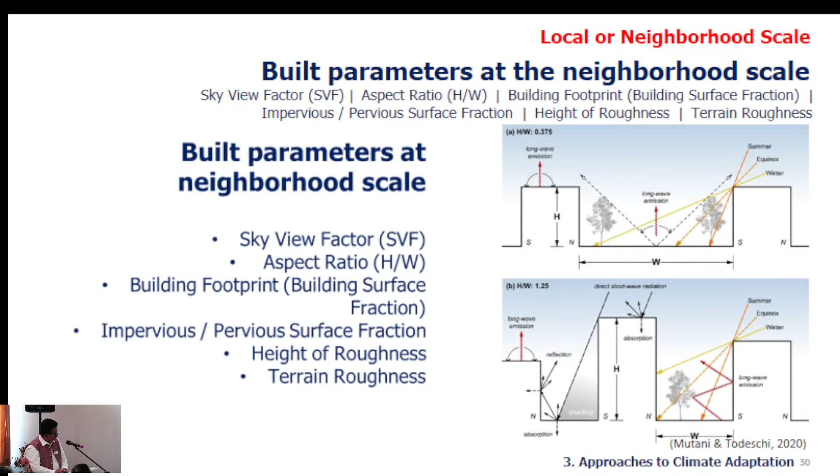So the equations I am telling you about can calculate at the local and neighborhood level. Now, because of the shortage of time, I know how much time I can take.

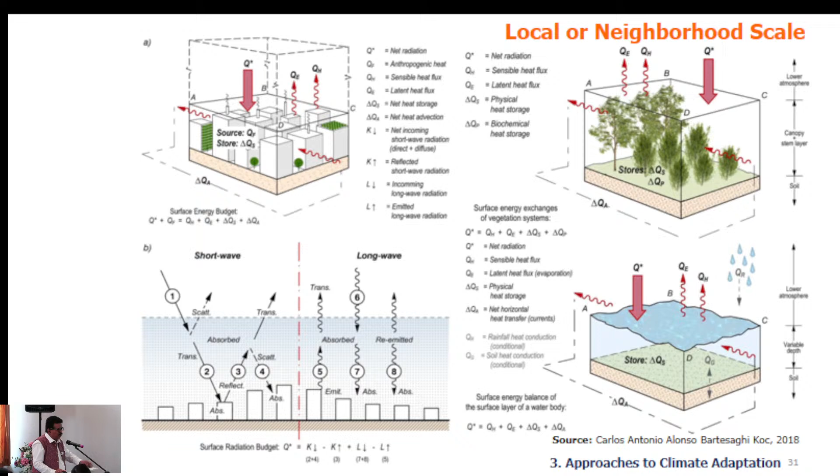Okay, you see this is an interesting thing. LCZ means local climate zones. Land cover zones will be getting integrated. With high density, a different type of development will be happening. What type of development can we have? High density and low rise - this is one type of development. Low rise means the percentage of coverage of a particular FAR you wanted to work out is more. Density is high - let us say 4.5.

Since it is a small room, my voice is fine.

There are different types: high density low rise, and low density high rise. Low density high rise means the FAR is less, and the percentage coverage is also less, so the building height becomes more. So one way to control building height is depending upon the percentage of coverage. 50% coverage means FAR is 1, meaning you can only have 2 floors.

That depends upon the plot. If it is 10% coverage in 40 acres of land, let's say, how many floors can you go for? So many floors you can go.

But up to a certain extent, whenever somebody says today's temperature or wind speed is 4 meters per second, or let's say 15 kilometers per hour, it means the wind speed is at a particular level. What is that level? My building is only two floors, maximum 6 or 7 meters, and my window is at 2.5 meters. How do I take that wind speed?

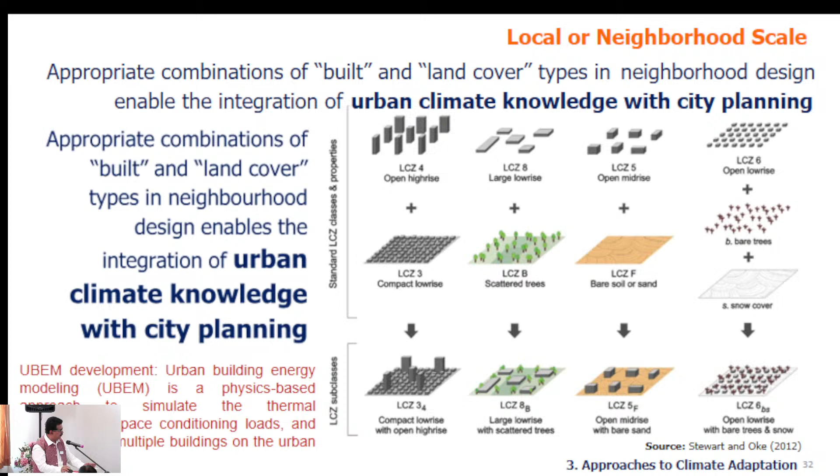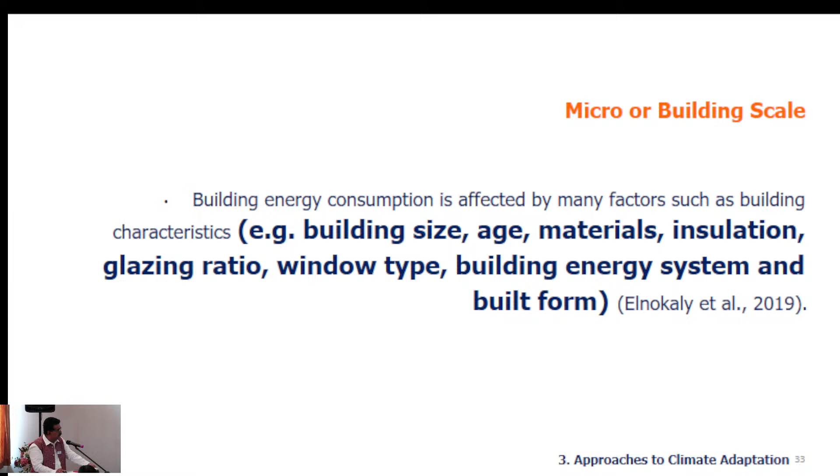Building size, age, material, insulation, glazing ratio, window type, building energy systems, and built form are the important micro level considerations, as shown in the modeling. Mitigation and adaptation measures generally include green measures, infrastructure related measures, stormwater management, and other items.

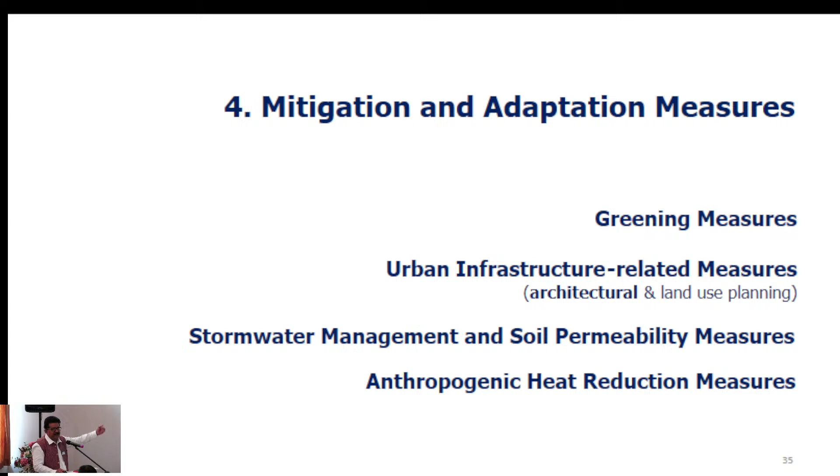We are just reviewing what we have discussed earlier, since we are coming closer to the close of our discussion.

Oh, this is not very clear, I don't know why. Building scale mitigation items, what it is going to show—anthropogenic heat, general heat—why is it not clear.

The components, individual items, what we can address at a city level, and that particular pocket talks about the heat dissipation in terms of the building. Whatever specific items are required, this material, whoever has it in their laptop should share it with all who are interested, so it can be seen clearly. It's not so clear, but I can tell you these are the methods we can work out.

The other item is specific at a city level, whereas this one you are seeing is the micro level.

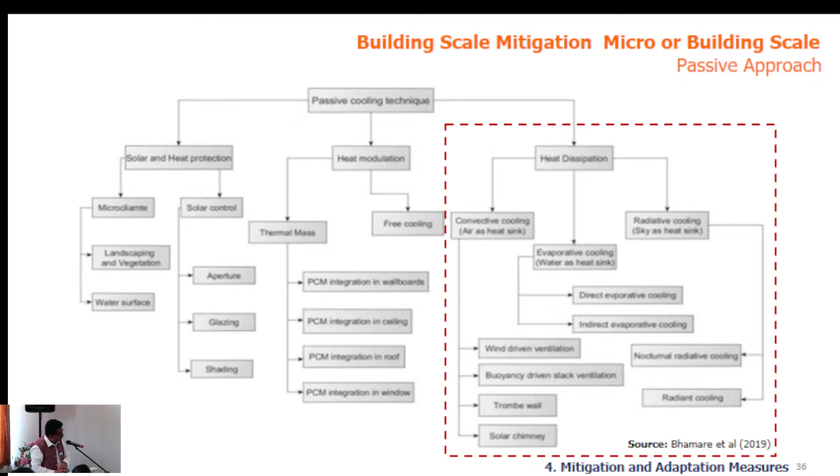Around a building I know very well, I have introduced deciduous trees in a composite climate. What are deciduous trees going to do for me in the composite climate next to this wall? This wall is exposed to the southern side, where in the northern hemisphere, we are at the northern hemisphere, right? India is in the northern hemisphere, is it not?